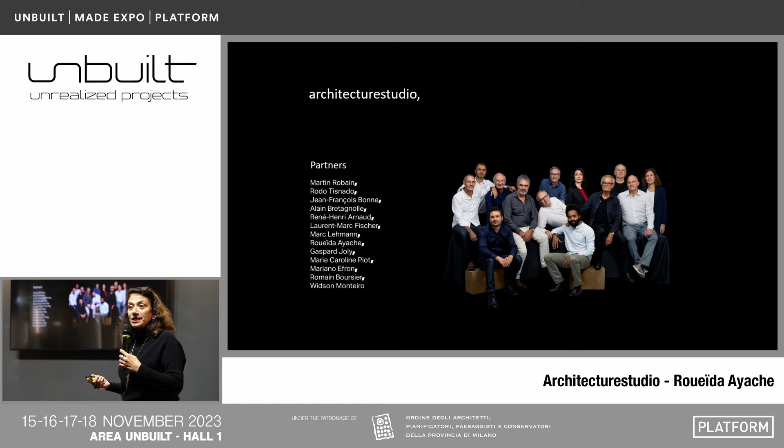What is special about our company, Architecturestudio, is we are 13 partner architects and we design the project jointly. We like very much exchanging ideas, sometimes fighting to get the best idea. We think that architecture is about that - it's not a dream that you have only inside yourself. You have to share it, and it has to become public at a certain point.

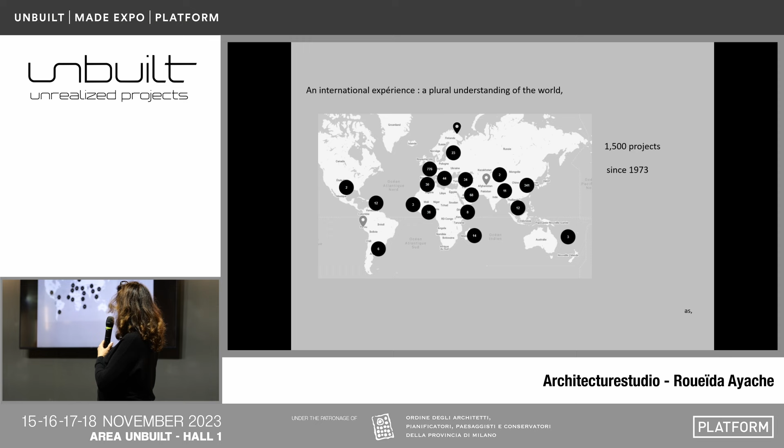So this collective conception led us to all these places in the world. We are very active in China, in the Middle East, of course, in Europe. We are based in Paris, and in Africa more recently. We have offices in Paris, Shanghai, Zug in Switzerland, and also in Abidjan very recently in Africa. Our company is around currently 170 architects among all these offices.

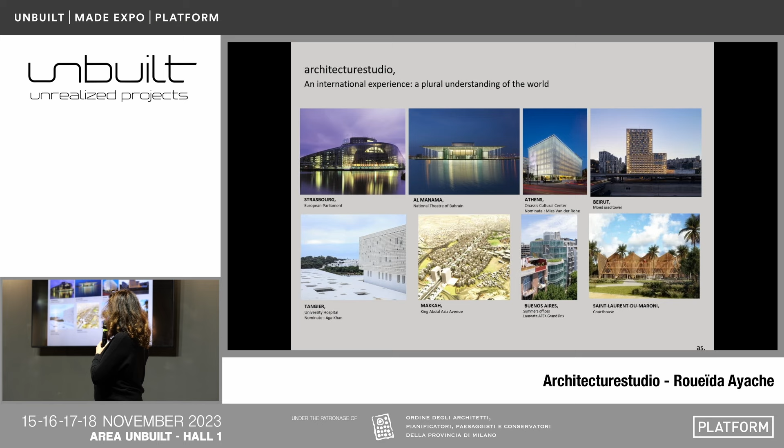So this international experience has provided us with a plural understanding of the world. As you can see here, we have worked on several projects that are cultural projects, institutional projects, like the European Parliament of Strasbourg, and some others that are, for instance, in Mecca. We did the initial master plan of what became Masar Mecca in Saudi Arabia.

We have a future-oriented approach, very environmentally conscious, and we like very much, where we work in a place, to work with the available material in this place, be it wood or earth or rammed earth sometimes, like in this market in Togo, in Africa.

We like doing complex projects, and thanks to the European Parliament of Strasbourg, we have great expertise in concert halls, in hospitals as well, which are very, very complex projects.

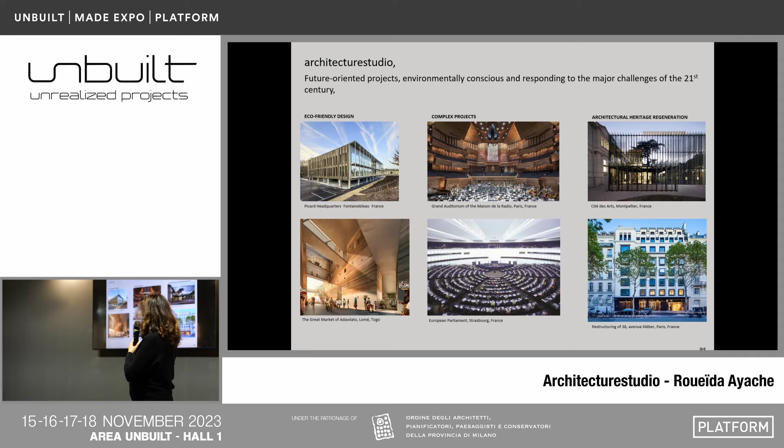And we really like using existing buildings also, because we think that in places like Europe, we have constructed already. We have several available spaces, and time is to give a new life to all these existing places, be it from the heritage or from the 20th century.

Our field of expertise ranges from tourism and leisure to residential, to healthcare, hospital, cultural building, and city making.

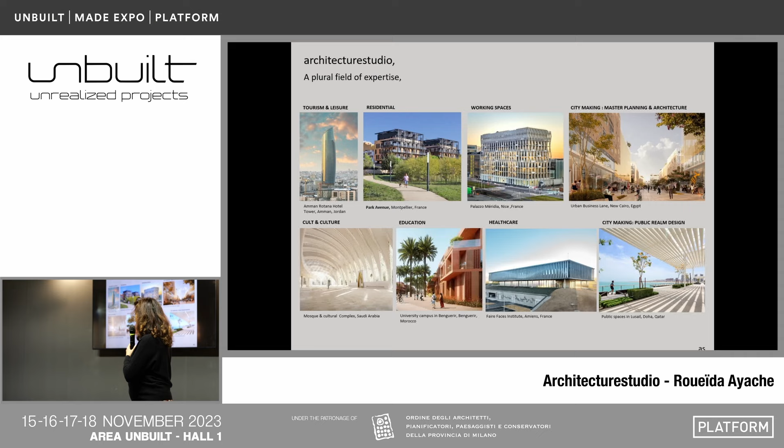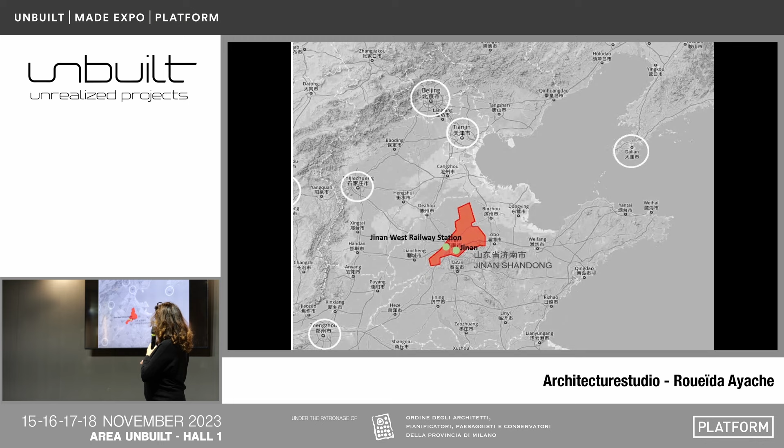So in order not to be too long, I will start directly introducing Jinan, which is the capital of Shandong in China. We started our work in Jinan by winning a competition that is constructed. This is Jinan - you can see how the cities in China are. You have a mix of some existing low-rise structure, which are sometimes being upgraded, and also you have skyscrapers in some areas. So it's really a patchwork of several ages of development.

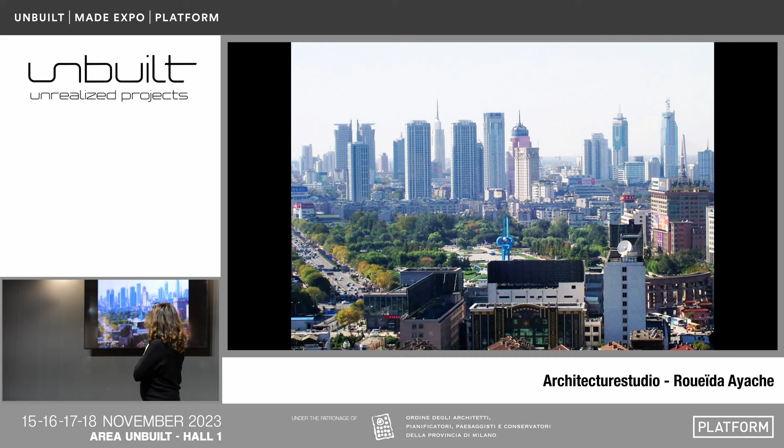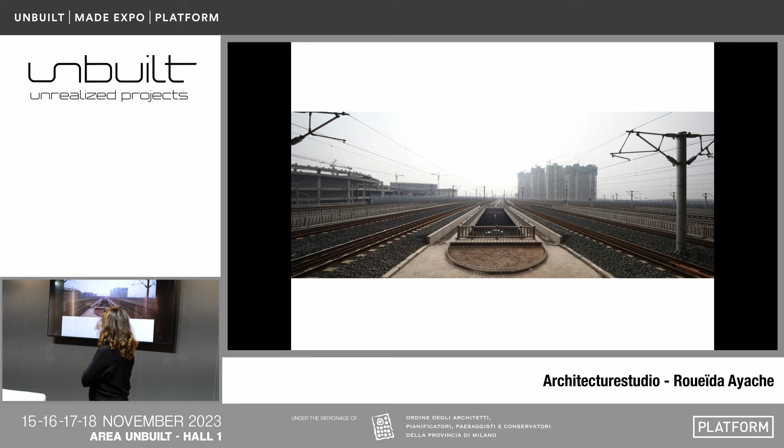So in Jinan, we started our experience designing a cultural and mixed-use center close to the rapid rail that will link it very quickly to Beijing and some other cities. Here you can see this area that was developed close to the Jinan West railway station. And our project was about this 500,000 square meter of cultural buildings.

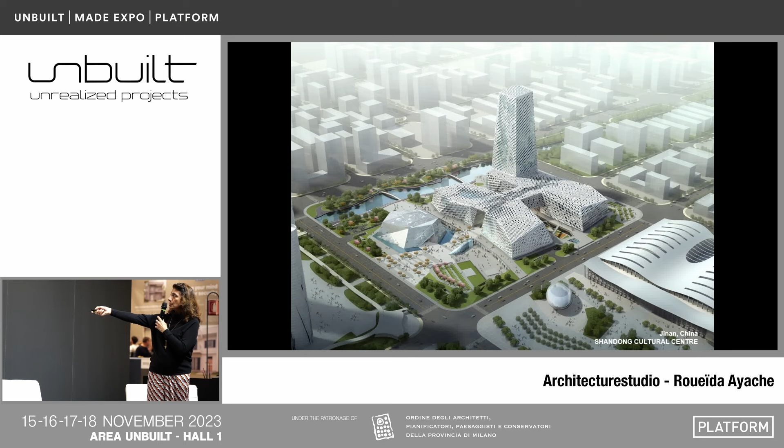We have 3 different cultural buildings in this. And then this was the second phase, under construction now, almost completed, with hotel, shopping center, and offices. So this is the first phase built. And this is internal spaces relying on a very nice public realm inside, a night view that we have.

And then after this project, we have been contacted by the local authorities in order to work on Jinan mines. The project I was showing was completely at the west of the city. So Jinan mine are at the east, where you see the red spot.

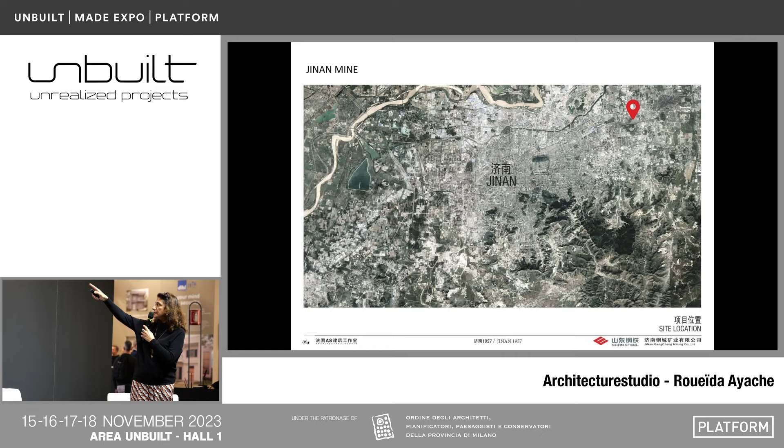Jinan mine, this is the site we have visited, started operating in 1957 with the first 5-year plan of Mao Zedong. So these mines were operating until the early 21st century. And then, of course, as the span of the site is about 200 hectares, the mines developed 35 kilometers of, let us say, underground galleries, and the whole space is about 400,000 cubic meters of space.

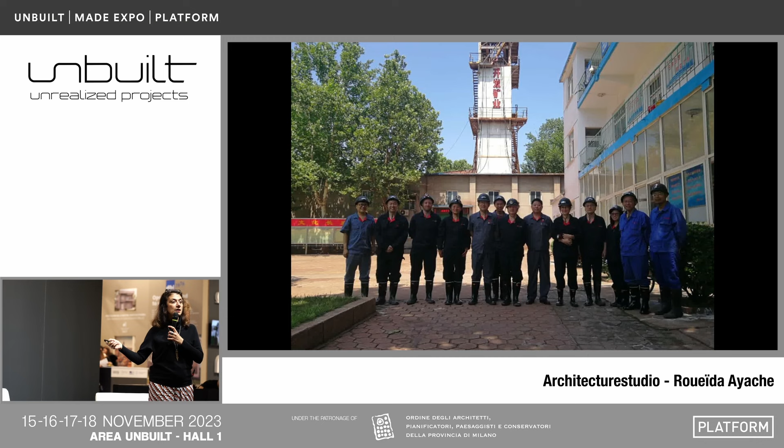So the idea was to do something with that. And they invited us to propose a touristic, leisure, and cultural project featuring, of course, a museum that will tell the story of the site. So here you can see how the site is.

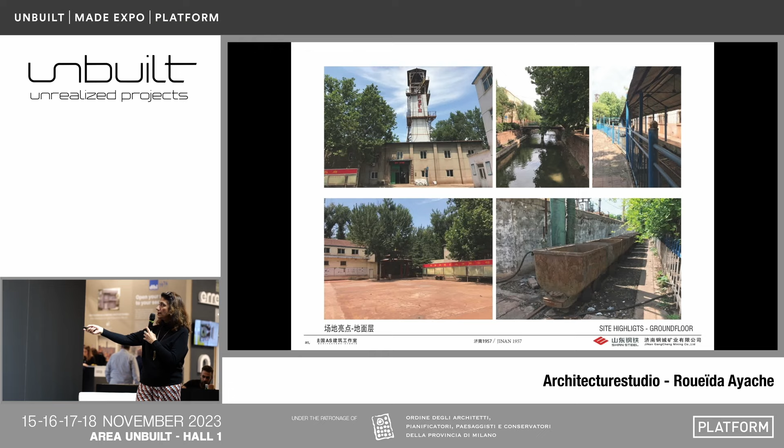So at the moment, it's not operating at all. Here we have the head frame, which is a very important signal of the place. And you can see how the tunnels can still be visited from this place.

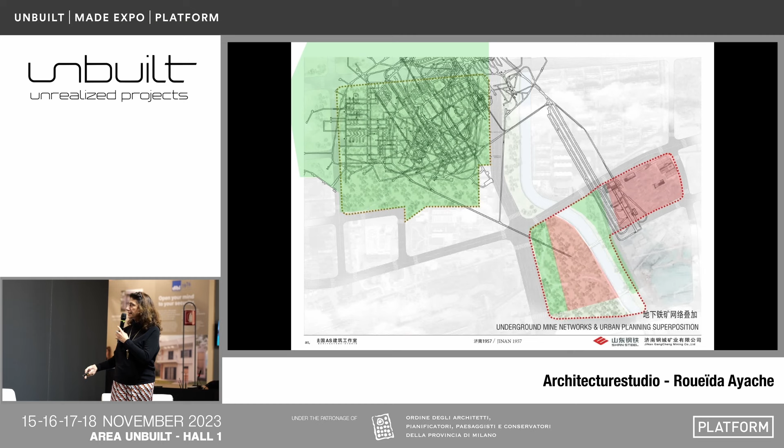Here's its location in the city. The city is built over it, but as they are completely remastering the planning of this area, the spots highlighted on this plan, and the network of underground galleries, are to become this project devoted to tourism and culture.

So the project will feature three entities: the Museum of the Mine, which will start with the head frames I've shown and the sites we are visiting. Then we'll have the funicular entrance with an existing inclined shaft of the mine. And then we will visit the mines.

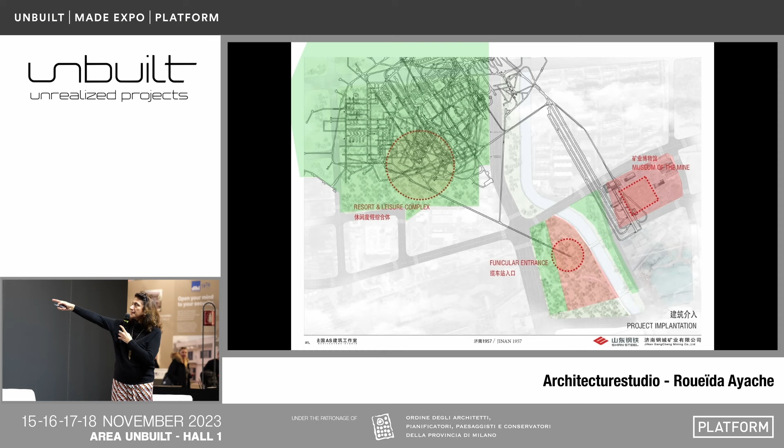The most important part of the mine is in this area here. We will develop the project at the different underground layers. So these are the three entities I was describing.

Our idea for the project, as I mentioned in the introduction, is to excavate. We want to continue this archetypical way of constructing, which is deducting - building spaces rather than building volumes. Here you can see a section showing what's happening, just to help you understand.

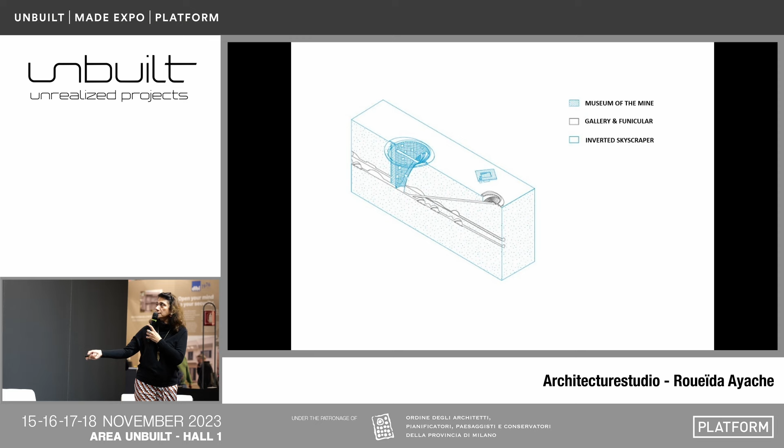So you have the museum, which is the squarish volume at ground level. Then you have the funicular that you'll implement to reach the bottom level of the galleries. And then we have the inverted skyscraper, which will feature a mixed-use structure, taking daylight from its upper part. Voila - this is the way we wanted to design this project.

No protrusion above ground, working on excavation to obtain this result. We keep the land completely virgin, and it's all about bringing daylight to what is already ventilated. Everything is well ventilated - of course it has to be revisited somehow, but we need to make sure some daylight allows bringing new life into these spaces, making them nice to visit, but also suitable to be a hotel or an office.

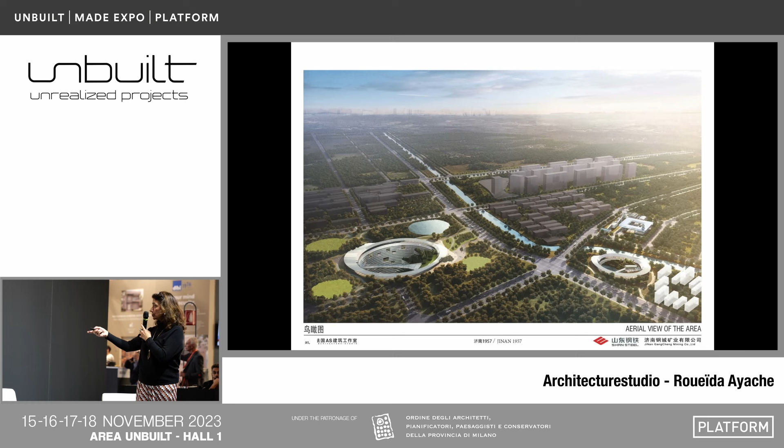So I'll start by showing you the museum and how it would work with the funicular access. This is the mine museum. We've decided it will reach level minus 240.

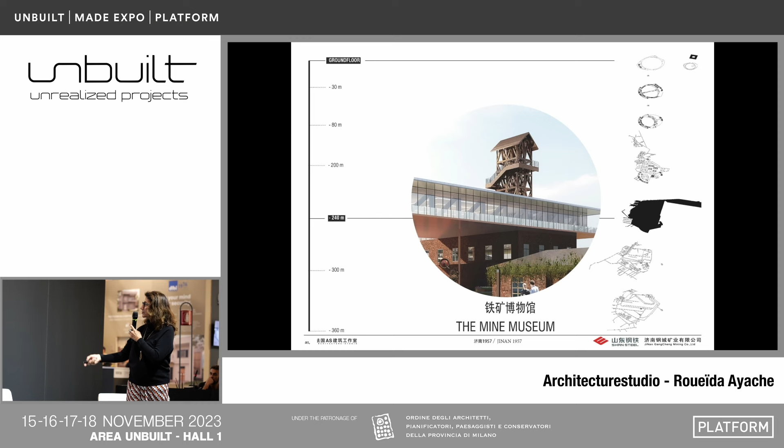You'll see this sketch in my presentation showing where we are. The ground will span from the ground floor and reach level minus 240 meters. And the museum, the mine museum, is completely elevated from the ground.

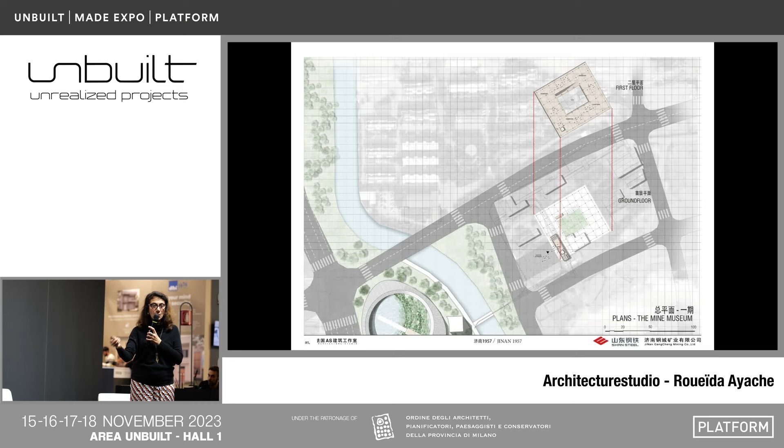What we decided is not to touch the ground here. We are not excavating for the museum because it will be the interpretation center of the whole site, and the museum by itself will be like this.

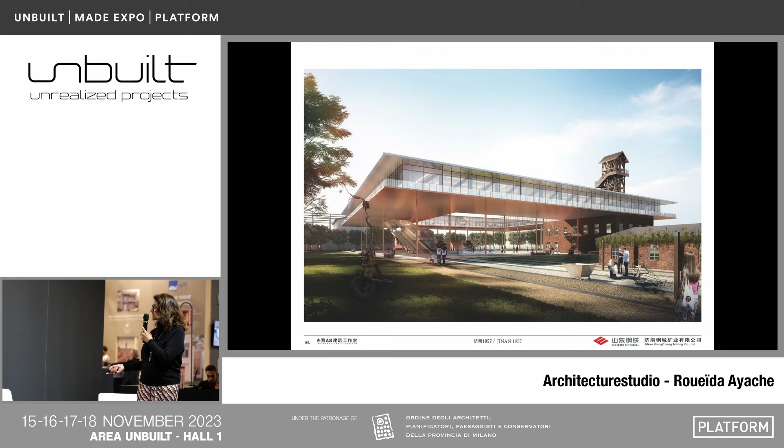Here you can see how it leaves the ground completely open. You can discover all the existing structures, and it will recall the history of the place and the history of this industry, which is very much related to the steel industry in the region.

Here you can discover the whole layout of the existing building through these galleries. So the architecture of the museum is very simple, and from this architecture we can reach the complex underground that we have.

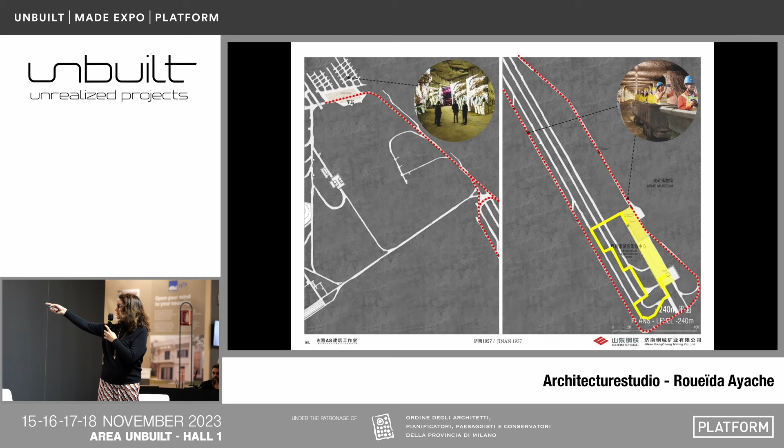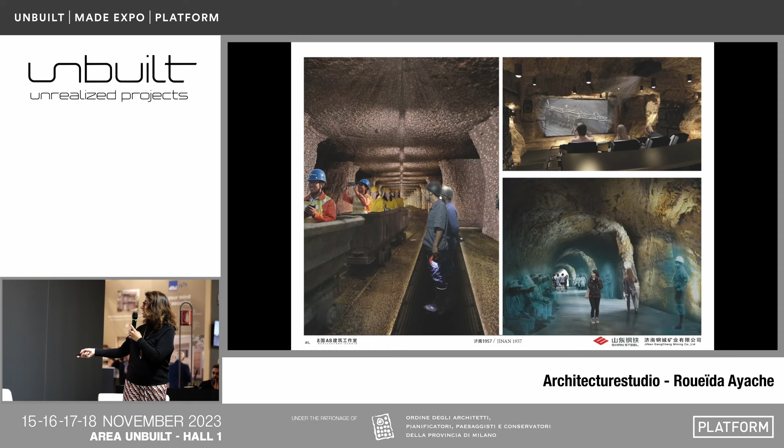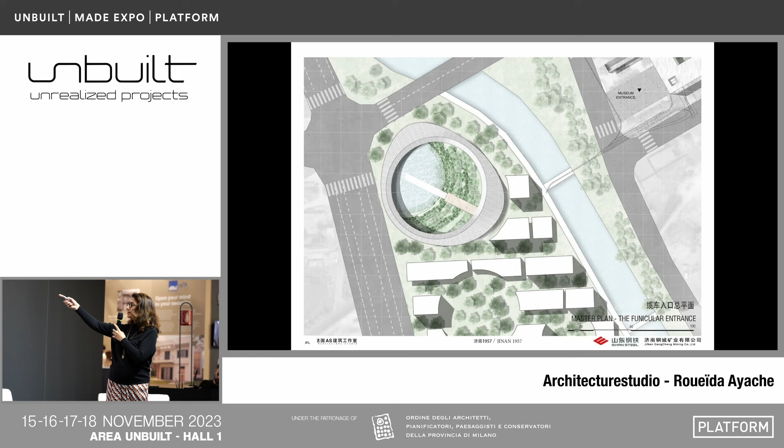Then we have another means to reach the core of these mines, the different galleries, through this funicular entrance that provides an alternative. The funicular entrance will be located facing the museum. From this gallery, we continue with a funicular to reach the bottom part of the mixed-use inverted tower. So people will circulate using these types of devices.

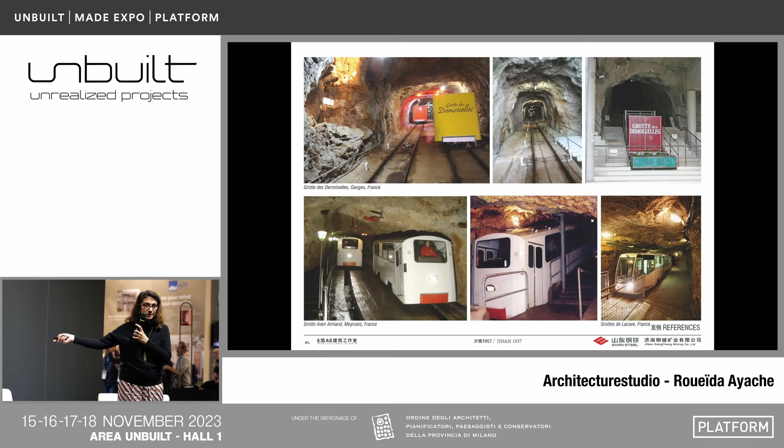Of course, in order to convince our client, we showed him several references that already exist and are successful, and invited him to go and visit himself to see how his future museum will work.

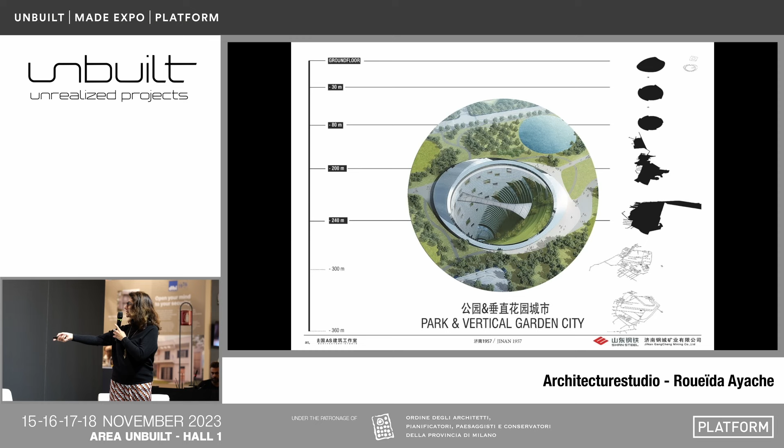Then the funicular will reach what we call the inverted tower, or the park and vertical garden city. Here we are reaching the minus 240 meter level of the mines. And you will see how this inverted tower will work.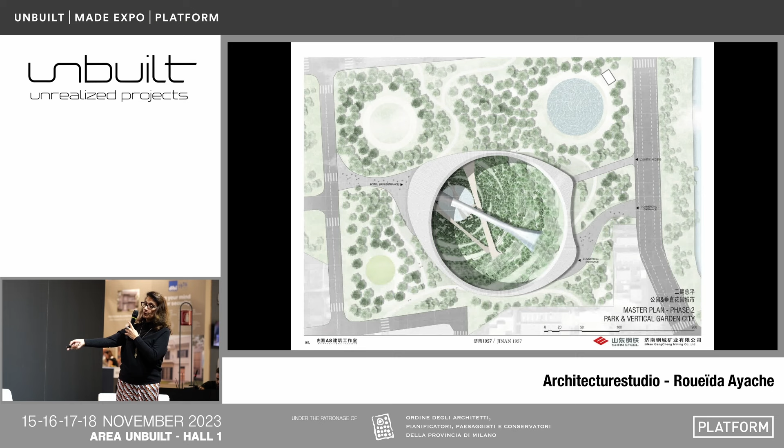So we have an opening which is more than 120 meters that allows, thanks to this section you can see here, to organize on the left part the hotel rooms, and on the right side we have a mixed use that offers leisure, offices and commercial, and also we have restaurants that I will show a little bit later.

It can be or cannot be covered by a dome. What I have to say about the climate in Jinan is that it's very, very cold in winter and hot in summer. So using this type of shaded and even warm space is a sustainable attitude, and also we are not building additional buildings. It's just using what exists and what is offered by the place.

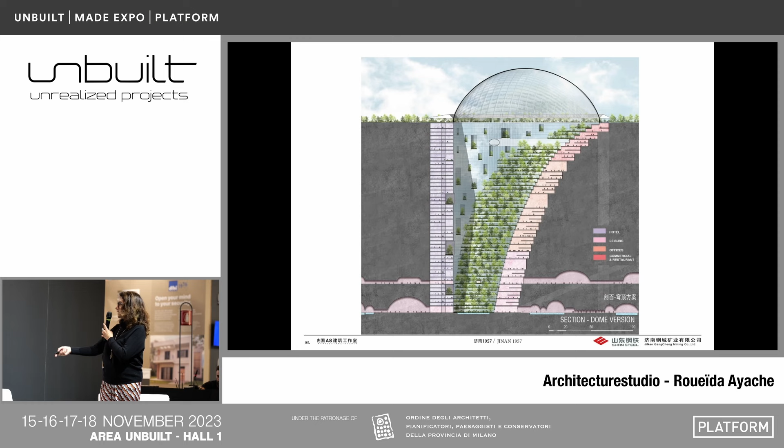So here you can see how this inverted skyscraper can reach two main platforms of the mines that are visited, easy to visit by people, because we'll create activities in these areas. So then we have the solution with the dome, okay?

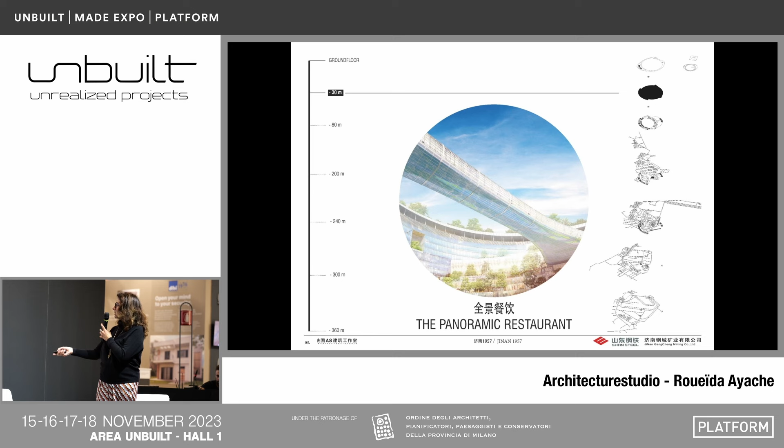And this is the restaurant. So the restaurant will fly over, the panoramic restaurant, over this opening of 120 meters. So the panoramic restaurant will allow linking one part of the hotel to the offices on the other part, and also create an animated place for people.

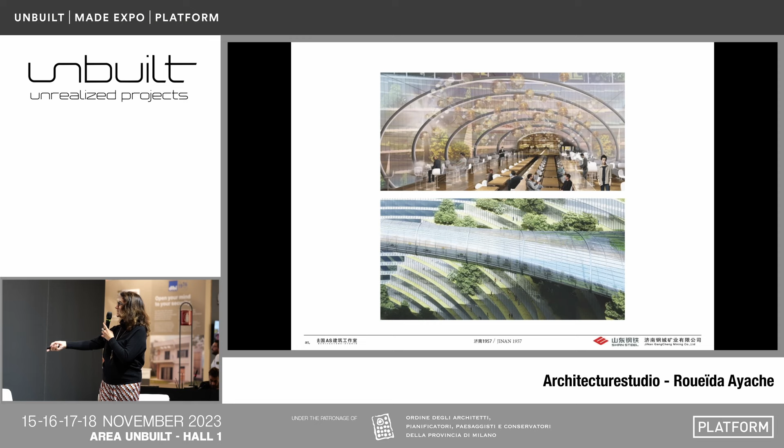So this is the atmosphere of the restaurant that we can have, really having this idea of flying. So it's really the counterpoint of the galleries, because here we are really detached from any materiality, and it's really like a completely glazed bridge. And then we reach some parts which are more material in order to create a contrast.

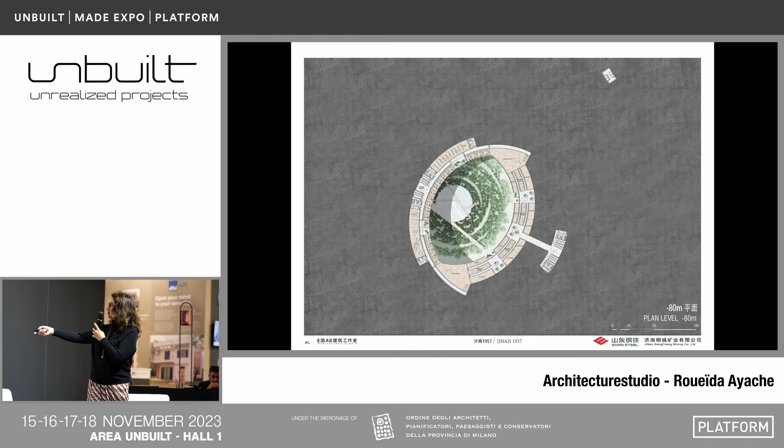Then we can arrive at a typical level, let us say minus 80 meters. We continue going down to see how the view will be when we are at this level. So this is what we will have. The daylight is still very good. And then we can have also, you see, the hotel and the atmosphere that we have.

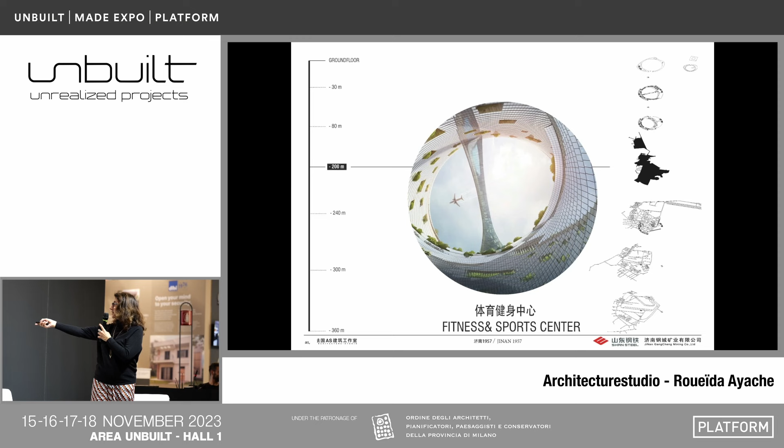And then at level minus 200, we have the fitness and sports center. Here, what we are doing is using the warm water, because we are really very deep in the ground and the water is very warm, and we can have what you have in Budapest. It means you don't need to warm it up, and it's really very nice to use it.

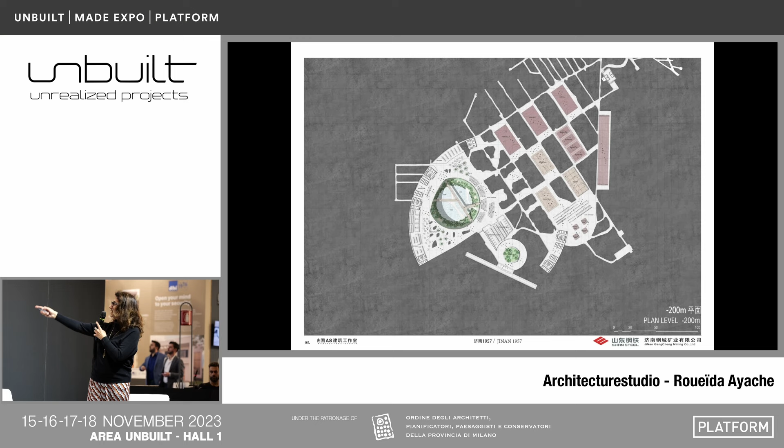So you see how our philosophy was always to associate a place where people would like to go, and then from this place they can visit the mines. So here, this minus 200 platform, which is one of the main platforms of the mine, is associated with the spa and wellness.

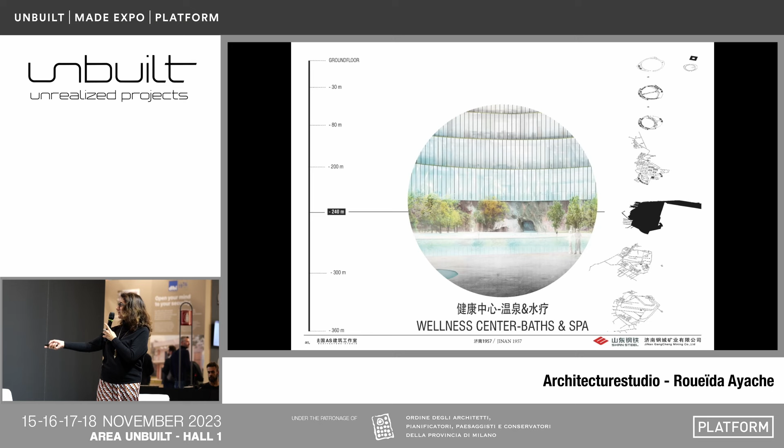And still here, you can have a view of what the sky will be from this level. So this is the type of sport and wellness activity that we'll have in this level. So this is the wellness center, bath and spa.

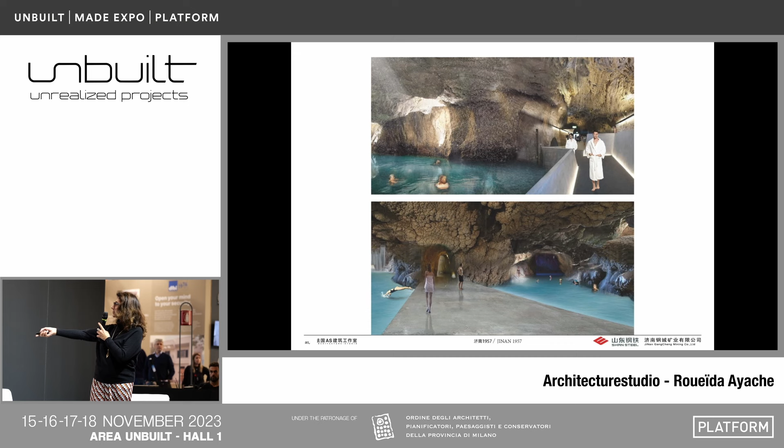Sorry, it's even lower. And then we have here also more water. This is the warm water that we are using. And we can explore by swimming all the galleries that are offered at this level, minus 240.

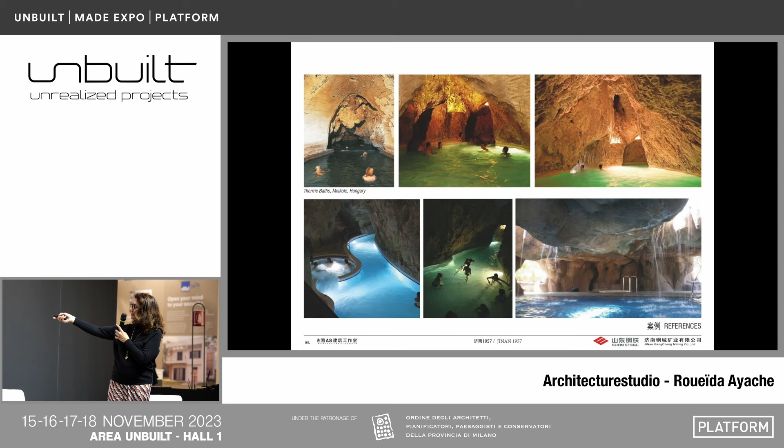Voila. So this is the atmosphere that we'll be happy to have. You can see here. And we have, again, some reference to show that it works and people can feel comfortable in this type of space already. The human experience can be great there.

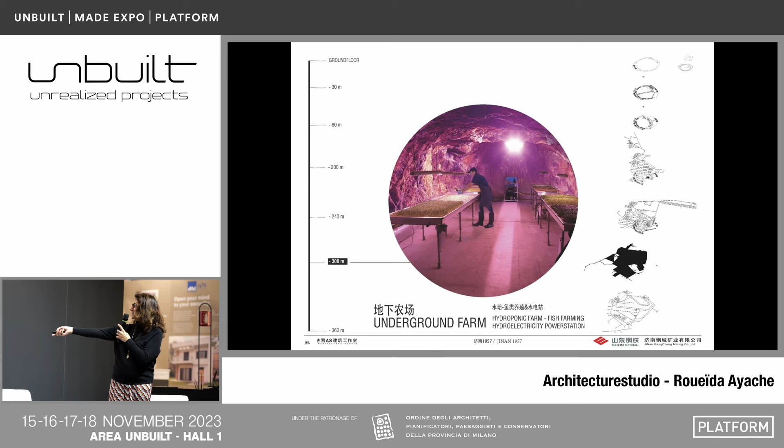At level minus 300, we have an underground farm with a hydroelectricity power station, and it's a hydroponic farm, of course, with fish farming. This farm is just trying to show how it could be. So here we become in a more technical part. People can visit, but not in the same number as the upper floors.

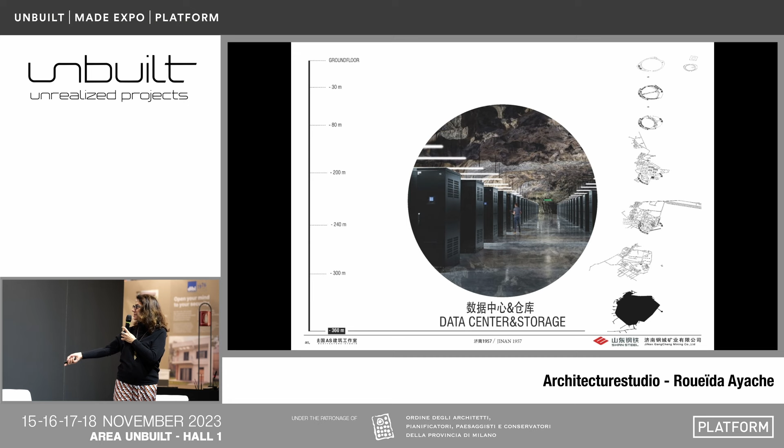And then to finish, at minus 360 meters, we have the data center and storage. And here we are using really every cubic meter of these galleries. Okay, so this is the data center. Thank you very much.

So this project with this magnitude was not done. That's why we are talking about it. But nevertheless, Jinan is starting to do something. As our project was phased, it happens sometimes that projects that are unbuilt, once completely designed, come back to life by fragments. And then, after all, with time changing, it will not be exactly this project, but it will have something of the exploration that we have provided in this project. Thank you very much.